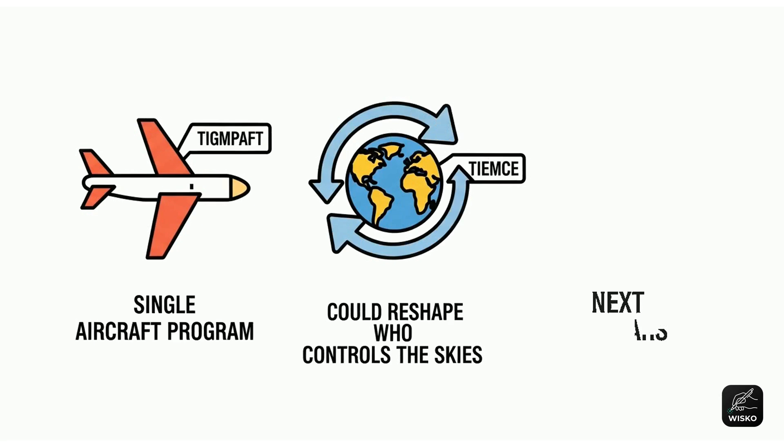Boeing and Airbus have owned commercial aviation for decades, and China just proved it no longer wants to depend on either. This is the story of the C919, its high-altitude cousin, and the engine China is racing to build entirely on its own. By the end, you'll understand why this single aircraft program could reshape who controls the skies over the next 20 years, and why countries far outside China are already watching this program with intense interest.

China's aviation push is not random ambition. It is a core part of a national strategy for technological self-sufficiency. The country's aviation market has grown massive, but its planes still mostly came from Boeing in America or Airbus in Europe. That dependence created a risk, because foreign sanctions or embargoes could ground large parts of China's fleet without warning.

So Beijing built the Commercial Aircraft Corporation of China, known as COMAC, to design a true competitor from scratch. Its flagship jet is the C919, a narrow-body aircraft aimed directly at the Boeing 737 and the Airbus A320. The program launched in 2008, and it took nearly a decade of work before the first aircraft was even ready to fly. Final assembly finished in November 2015, and the maiden flight happened in May 2017, 9 years after the program began.

Certification took even longer, with China's Aviation Authority finally granting the type certificate in September 2022, 14 years after launch. The first C919 reached a customer in December 2022, and it began flying regular commercial routes in May 2023. That is 15 years from launch to paying passengers, showing just how difficult building a competitive airliner really is.

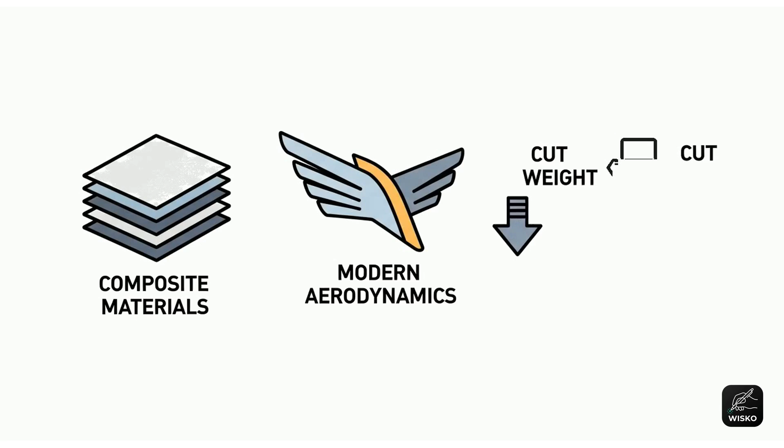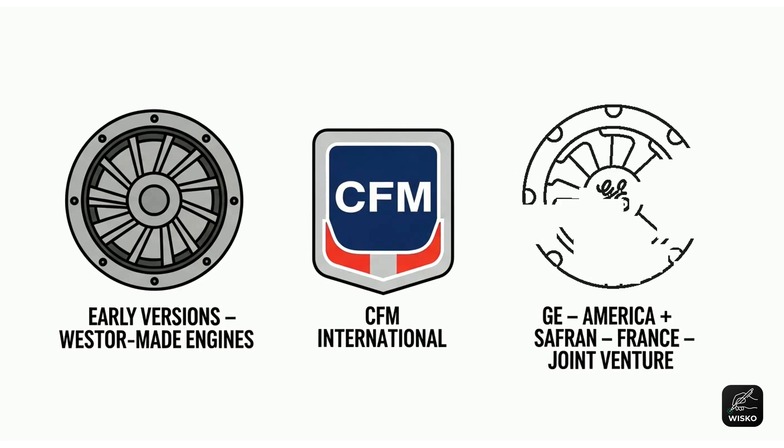The standard C919 carries between 158 and 192 passengers, with a range up to roughly 5,555 kilometers, depending on configuration. It uses composite materials and modern aerodynamics to cut weight and improve fuel efficiency compared to older aircraft designs. But its early versions still rely on Western-made engines from CFM International, a joint venture between America's GE and France's Safran. That single dependency is exactly what China is now working to eliminate, and it's the real story behind this next development.

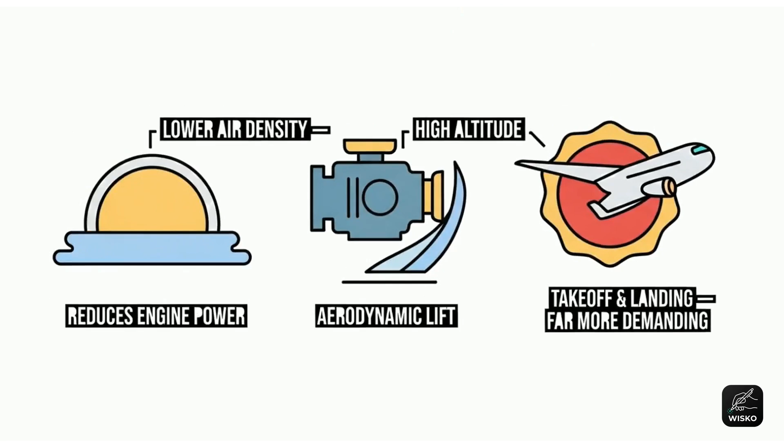In China's western regions, airports in Tibet and Qinghai sit above 3,000 meters, where thin air makes flying genuinely harder. Lower air density at that altitude reduces both engine power and aerodynamic lift, making takeoff and landing far more demanding. COMAC's answer was the C919-600, nicknamed the Plateau, a variant built specifically to handle these extreme high-altitude conditions. It completed its maiden flight from Shanghai Pudong International Airport in late July 2026, the flight that opened this story. Engineers shortened the fuselage and upgraded the avionics, changes designed to sharpen takeoff, climb, and landing performance in thin air.

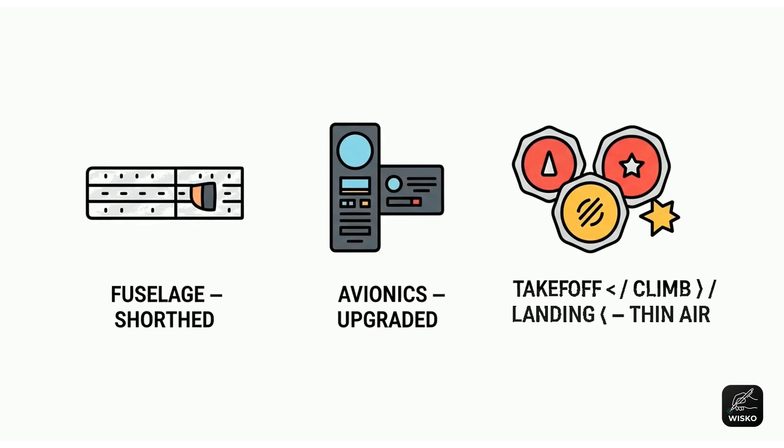This was not a side project. COMAC had already signed a 2023 agreement with Tibet Airlines to co-develop this exact variant. That partnership turned into a firm order for 40 aircraft, giving the Plateau a real customer before it ever left the ground. It's built to compete directly with Airbus models that have historically dominated high-altitude routes across mountainous regions worldwide.

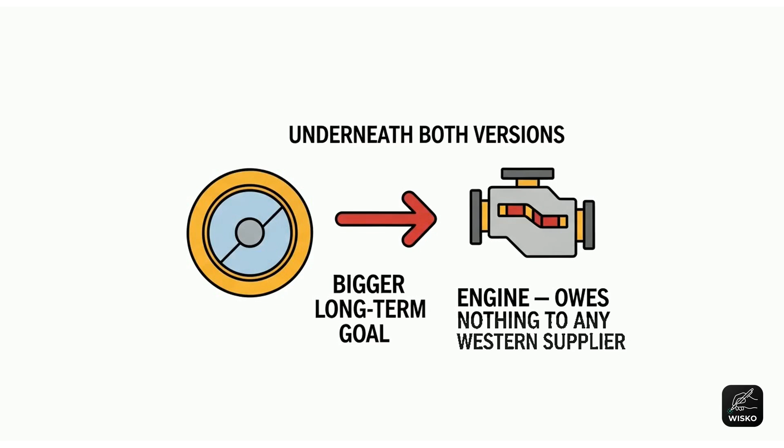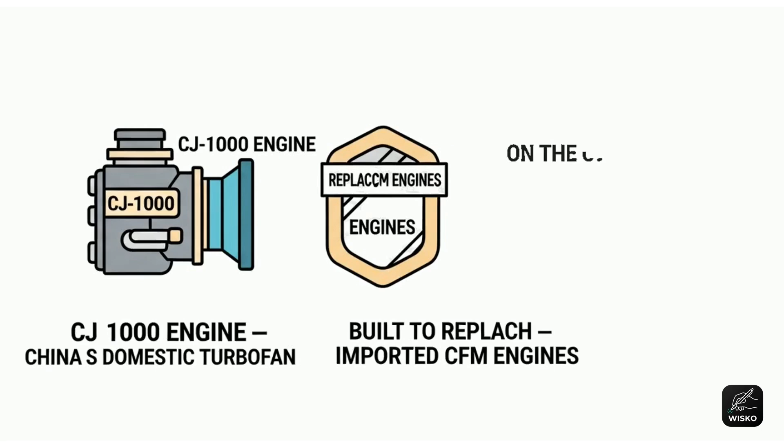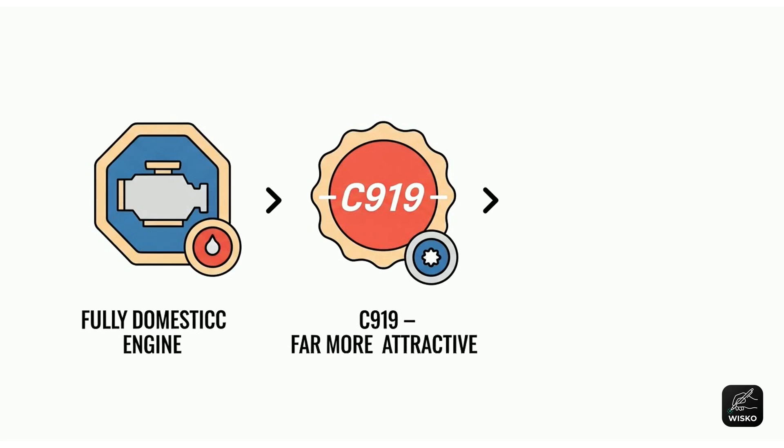Underneath both versions sits the bigger long-term goal: an engine that owes nothing to any Western supplier. That engine is called the CJ1000, China's domestic turbofan built specifically to eventually replace the imported CFM engines on the C919. Beijing's current 5-year plan explicitly calls for localizing critical components like this engine, not as an option, but as a target. A fully domestic engine would make the C919 far more attractive to countries nervous about relying on U.S.-linked supply chains. It would also insulate China's entire commercial fleet from any future sanctions targeting foreign-made aircraft parts.

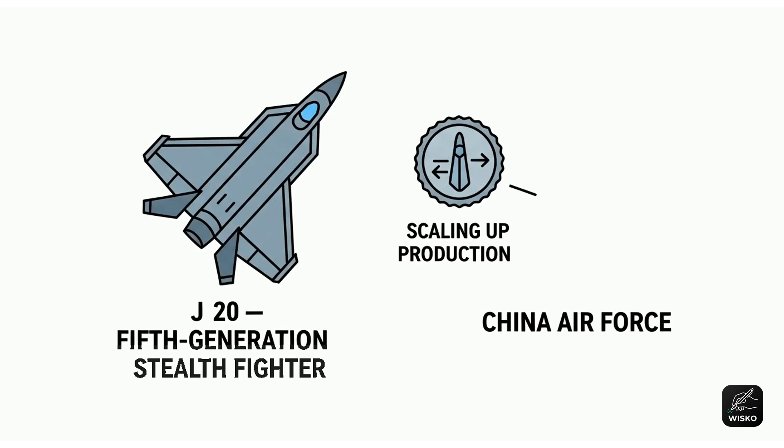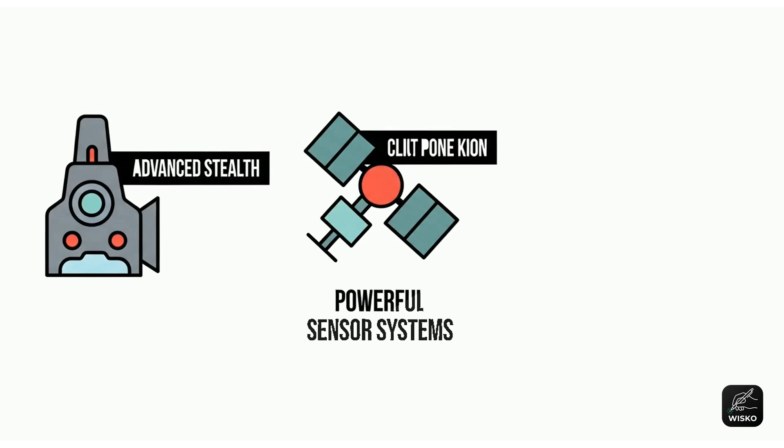This same engineering push shows up clearly in China's military aviation, which reveals just how far its aerospace capability has come. China is already scaling up production of the J-20, a fifth-generation stealth fighter jet flown by its Air Force. More striking, China is the only country to have flown prototypes of sixth-generation fighters, with test flights starting in late 2024. These aircraft are designed with advanced stealth, powerful sensor systems, and a potential combat radius of 2,500 kilometers.

Powering some of these jets is the WS-15 engine, already integrated into enhanced J-20 variants and built for the sixth-generation fighters. Its power-to-weight ratio is considered comparable to America's F135 engine, which powers the U.S. F-35 fighter jet. So the same country building a commercial jet is simultaneously closing the gap in the most advanced military aircraft on Earth.

Back on the commercial side, the stakes are enormous because China's own fleet is expected to more than double in size. Forecasts show China's roughly 4,652 commercial aircraft potentially growing past 9,700 planes over the next 2 decades. Every C919 that fills part of that demand is money that stays inside China, instead of flowing to Seattle or Toulouse. It also builds domestic industrial capacity, giving Chinese suppliers and factories decades of manufacturing experience they never had before.

But going global is a different challenge entirely, one COMAC has not solved yet. To sell C919s outside China, the aircraft needs certification from bodies like America's FAA or Europe's Aviation Safety Agency. Neither has certified the C919 yet, and without that approval, most international airlines simply cannot legally fly it. COMAC also needs global maintenance networks, spare parts pipelines, and after-sales support, all of which take years and serious investment to build.

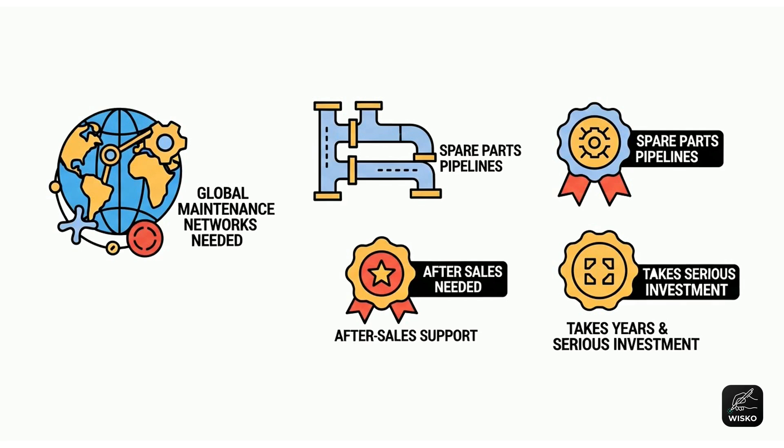Cost is one advantage working in its favor, since the high-altitude variant and future CJ1000-powered jets promise lower operating expenses. That could appeal strongly to cost-conscious airlines in developing regions that Boeing and Airbus have never prioritized. The C919 program was never really about one airplane. It was a testing ground for an entire aerospace industrial ecosystem.

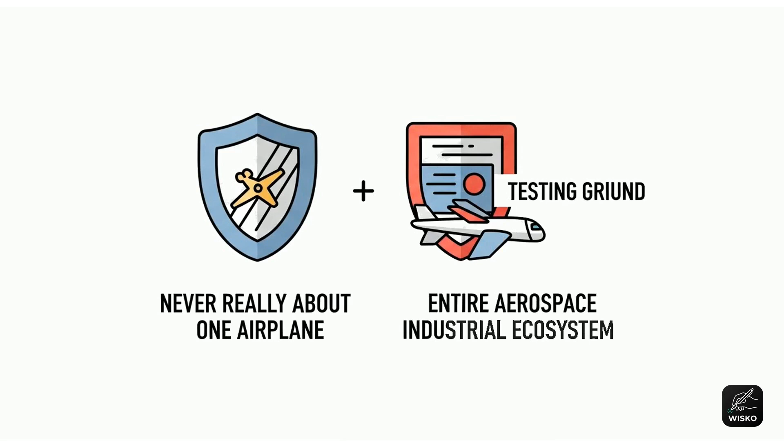Its success is already clearing the runway for the C929, a future wide-body jet meant to challenge the Boeing 787 and Airbus A350. If China nails both the domestic engine and international certification, it stops being a regional player and becomes a true global rival. That would not just squeeze Boeing and Airbus, it would ripple through their entire network of parts suppliers worldwide.

Aviation has become one of the clearest signals of China's 21st century economic and geopolitical ambitions. A country that builds its own engines and its own stealth fighters does not stay dependent on anyone else for long. The Plateau's first flight in July 2026 was a small test flight on paper, but it represented a much bigger shift underneath. It showed a country closing the technology gap on 2 fronts at once: commercial jets and military air power, using the same expertise.